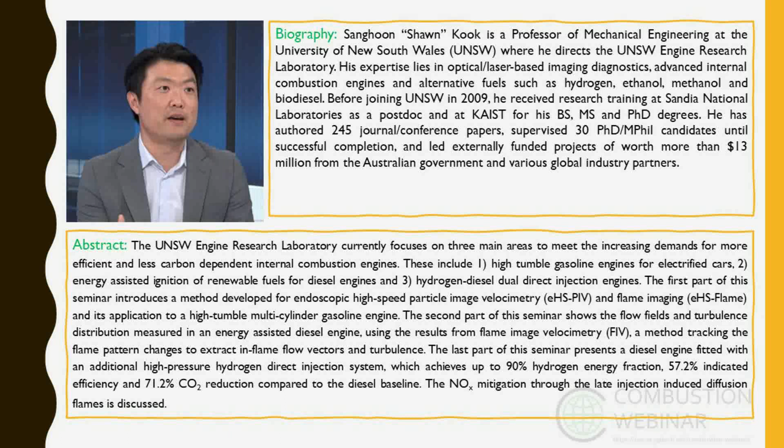My message to the field is that there are many exciting keywords you can explore to further develop or completely redevelop the internal combustion engine for future application. So I picked up 3 topics, keywords. The first is high-tumble, rooted for petrol engine, gasoline engine in your term, for those of you not familiar with the British term. High-tumble is applicable for petrol engine; energy assist is used for diesel engine in operation with low reactivity fuel, and I'll get to that point later on. And the pretty big buzzword: hydrogen.

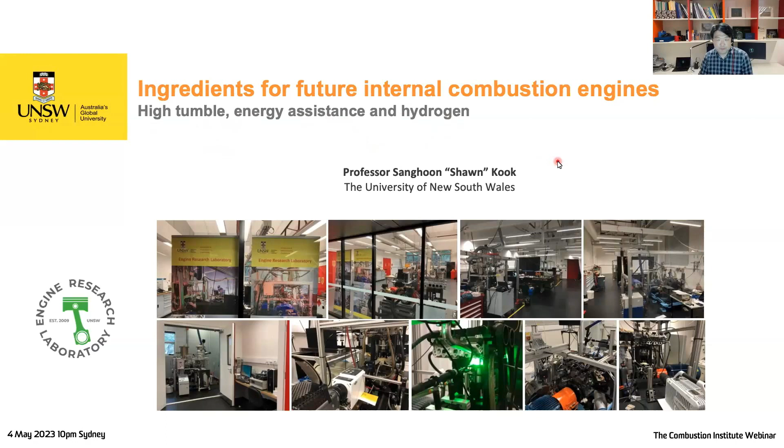I face this, and I think you'll agree with me, that in policymakers' minds, internal combustion engine is pretty much dead. Their impression of the current internal combustion engine is that it's just junk metal with no future in it. In comparison, they think the electric drive with shining color, that would be the future. That's how the policymaker's mind is set.

But in reality, if you are an engineer or scientist knowledgeable of advanced engine technology today, the new engine is looking just like the new electric drive. It's just shining like silver. It's new, purely advanced, many high-tech elements all implemented in this lovely machine.

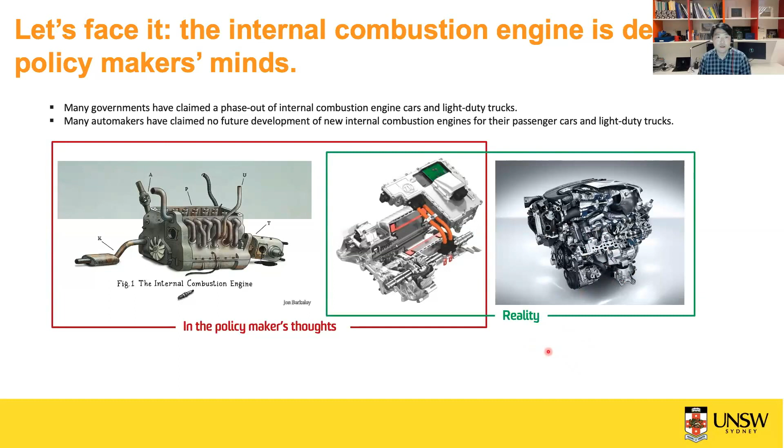So I'd like to suggest a quick reality check before I go into some of the technical details I've prepared. The reality is that people are still buying internal combustion engine vehicles, and they will buy internal combustion vehicles in any foreseeable future. Market analysis is actually saying that even towards 2027, there will be annual growth of the internal combustion engine market exceeding 8% annually.

Bringing this kind of number to investors, they will just jump off and try to bring in any money that they have into it. So this is a still exciting and growing market that everyone can enjoy.

The growth would be definitely around Asian countries, Australia, and the Middle East. But even in the US, there are still many buyers rooting towards the internal combustion engine vehicle. Of course, there's an increasing number of people who would be interested in electric vehicles as their next car, but equally, when it comes down to the real deal of the next vehicle purchase, it actually comes down to internal combustion engine. That's how the market analysis and survey is suggesting.

The policymakers' efforts to completely phase out internal combustion engine in European countries has failed. It is more or less that the experts' voice was finally heard. There are a lot of factors around it, but in the end, it is internal combustion engine that has longer-term value. Having carbon neutral fuel - fuel generated using CO2 so that the emitted CO2 from the vehicle is considered zero towards CO2 contribution to the environment - is carbon neutral fuel. As far as synthetic fuel, like carbon neutral fuel, is used in internal combustion engine, that internal combustion engine will be considered next generation technology too, even in European countries.

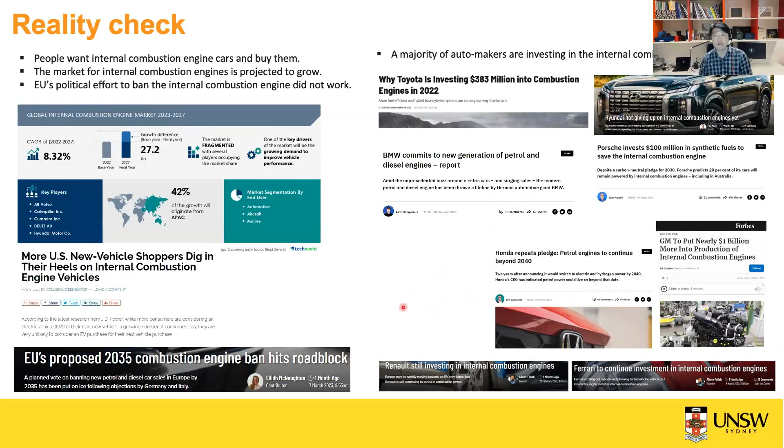That's my stance here. So what do we want? We wanted to develop new technology that can be prepared for the future. And if we have internal combustion engine technology that can be part of the future of mobility, it will definitely be heard. I saw some questions around it, and I don't mind taking those on board during the seminar.

There's a question about the success of comments. I don't know exactly what that means, but if you specify the question again, I'll be able to take it on. If you type in the question, I'm pretty sure I can read it out and address it during the seminar, or Professor Tiegang Fang can.

It's better to answer them at the end, so we can. Oh okay, yeah, that's, thank you. That's also a good option. So I'll give you the talk briefly, and then later try to address the questions live. Even after the webinar, please use the comment section to ask further questions, or try to reach me out - I'll be happy to address any questions.

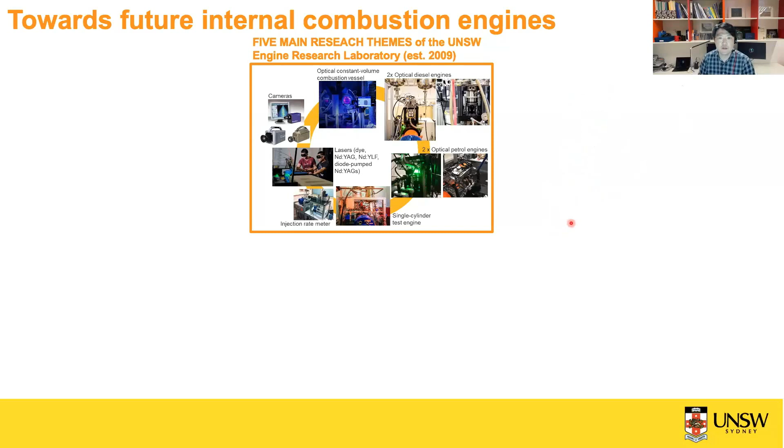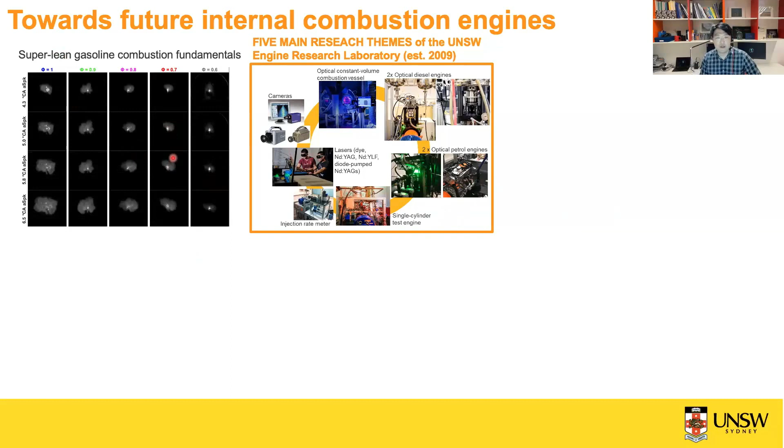At the University of New South Wales, we're working on five main themes at the moment. One would be very consistent with many others' research: super lean burn - gasoline engine running on lean homogeneous or lean stratified mixture for significantly improved fuel economy. That works really well with hybrid operation too, so when the gasoline engine is electrified together with electric drive, it achieves massively improved fuel economy and CO2 reduction in return.

The second theme we are very active in at the moment is flow and turbulence measurement, towards further improved efficiency of the gasoline engine. There are a lot of things that need to be researched regarding petrol engine flow and turbulence, which means there is potential for further improvement regarding fuel economy as well as CO2 reduction. And when it comes down to diesel engine, it's so ubiquitous.

Diesel is versatile for a range of applications. One area we're actively working on is a diesel engine used in unmanned aerial vehicles that is compact, durable, and powerful, and can handle long range operation, especially when the fuel type is very different to conventional diesel. How we address that combustion condition is one main problem we are addressing at the moment.

And of course, a lot of people are interested in hydrogen. We were lucky enough to step into this hydrogen area a few years back, around 2017-18. There was high interest in utilizing existing infrastructure by retrofitting some of the diesel engines. So we took up that research topic and have produced some exciting outcomes, which we'll introduce today.

There's also very long-term research that I will continue no matter what - fundamental research, actually welcomed by the Combustion Institute in many ways. We look into carbon particle structure in a very exciting way, exposing sampling probes right into the reacting flame. Within, there are many soot particles forming, and we change the sampling timing, duration, and all the parameters to look into soot particle evolution and structural evolution during combustion. It's been applied to both diesel engine and petrol engine operations, and keeps producing exciting new papers.

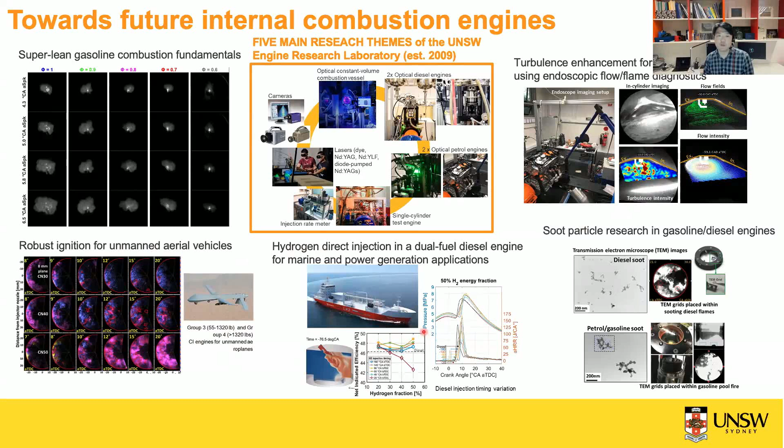For the given time and its timeliness, I prepared flow diagnostics in a petrol engine as one topic, energy assist ignition in a diesel engine as a second topic, and hydrogen in a diesel engine as a dual fuel combustion mode as a third topic.

So there we go - the high-tumble gasoline engine is one technology that can be adopted into electrified powertrain in a very effective manner. For example, Nissan or Ford would say here is BMEP, brake mean effective pressure, which is a power output - a normalized power output, the work divided by displacement volume.

So looking at power output over the engine speed map, we have operating conditions that could be covered by electric drive. All these troublesome operating regions can be covered by electric drive, such as low-end high torque regions where engine speed is low but drivers press on the accelerator pedal aggressively, maybe to take over other cars or go uphill at slow speed. When that happens, fuel economy really struggles, and the power output generation really struggles. That can be boosted by having the electric motor, so the internal combustion engine gets nice assistance from the electric motor in that area.

Just another example is low speed. When it's running at low speed, the fuel economy is actually awful in an internal combustion engine, so that can be assisted by the electric motor. When that happens, the role left for the internal combustion engine is what's called high efficiency operation, within the mid power output and mid engine speed range. That's left as an excellent operation mode for the internal combustion engine, the region where high efficiency can be maintained without worrying about all the other troublesome operation zones in this BMEP and engine speed map.

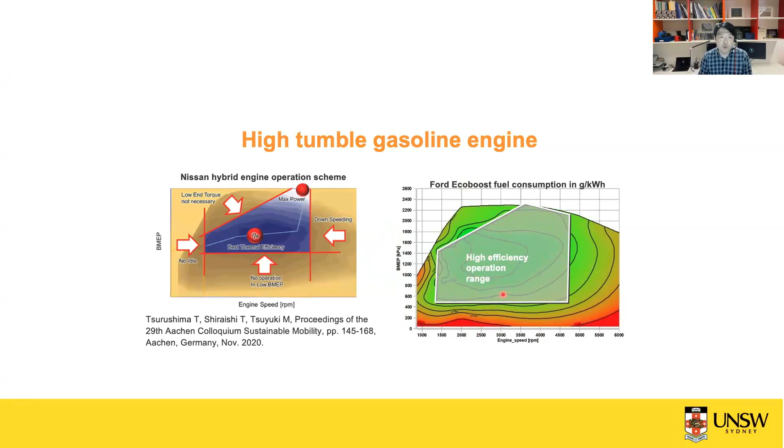So for that high efficiency engine operation, high tumble is the key. Let's run a very quick and brief fluid mechanics lecture here. What's turbulence in an engine? Intake airflow going into the cylinder contains a lot of turbulence - it is in the first place very turbulent flow. The flow goes in, but unfortunately the turbulence decays very quickly.

By the time you want to utilize it, like near top dead center where the spark is applied and flame propagation happens, you wouldn't have much turbulence left. Because of that, we design the flow so the intake flow has a very well-defined structure that can carry this high turbulent energy within. We are encapsulating the high turbulence within the well-defined flow so it can be carried all the way to the near-TDC region. Once the piston reaches near TDC, the space is limited and the flow has nowhere else to go, so it starts to break down.

Specifically in a typical Pent-roof type petrol SI engine combustion chamber, the initial intake flow structure is more or less tumbling. The intake port passage and combustion chamber are designed to create that well-defined bulk flow structure called tumble flow. Near TDC it has nowhere to go other than breaking down, while the tumble flow switches over into swirling motion - swirl flow. During that flow breakup we tend to generate a high level of turbulence that we can utilize near top dead center. That's the brief fluid mechanics of why high tumble flow can be utilized for high turbulence, and in the end a high efficiency petrol engine.

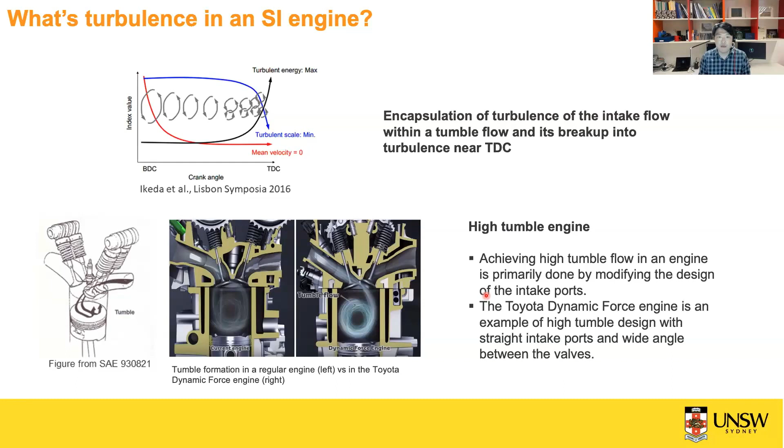For that purpose we've designed a diagnostic method - that's where our excitement is. We maintain the existing 4-cylinder conventional high tumble petrol engine as it is, while adding just 2 holes, one for the camera endoscope and the other for the laser endoscope. Specifically it's a rigid endoscope, a borescope. We have 2 borescopes mounted, one to the side where the laser beam can go in to illuminate whatever is happening within the cylinder, and the camera normal to the angle of the laser beam so we can get a 2-dimensional view of the flow field, like the cross-sectional view of the Pent-roof combustion chamber.

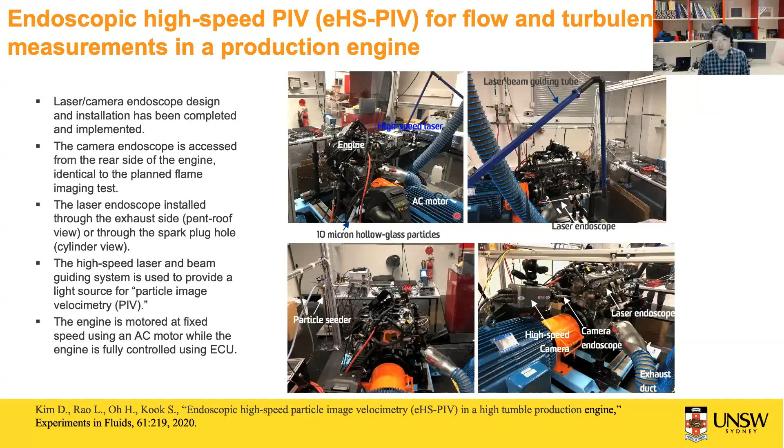There are solid particles, specifically 10 micron diameter hollow glass particles, flowing into the intake manifold, distributed nicely and flowing into the intake port. The flow goes into the combustion chamber and we are visualizing it. The result example is shown here - this is the Pent-roof shape, and the piston is right there. The bright illuminated light is where the laser is hitting the piston top surface. We have particles flowing in together with the in-cylinder flow, tumbling motion, and we're capturing the particle motion.

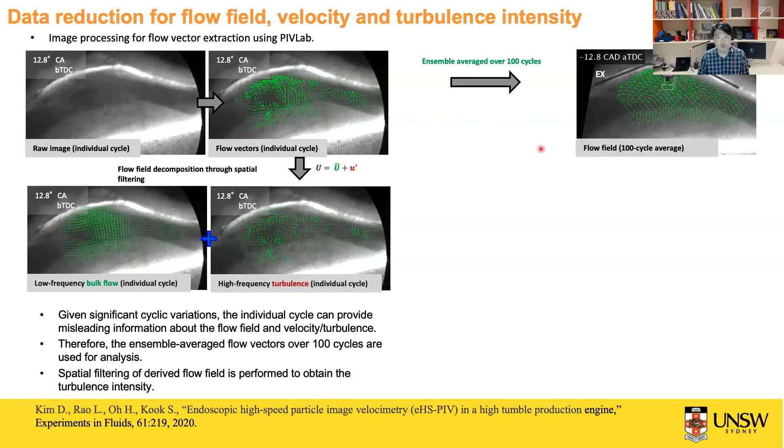We run the PIV algorithm, primarily implementing multipass fast Fourier transform, then get the vectors extracted and apply spatial filtering so that for each individual cycle we can get bulk flow magnitude, bulk flow vectors, as well as turbulence. If you repeat this for over 100 cycles, we get an opportunity to ensemble average these individual cycles to get a well-defined flow structure from the averaged view of the vectors, and can extract quantitative information such as flow velocity magnitude and how that changes over varied crank angles, and extract the turbulence and how much turbulence energy changes along the crank angle.

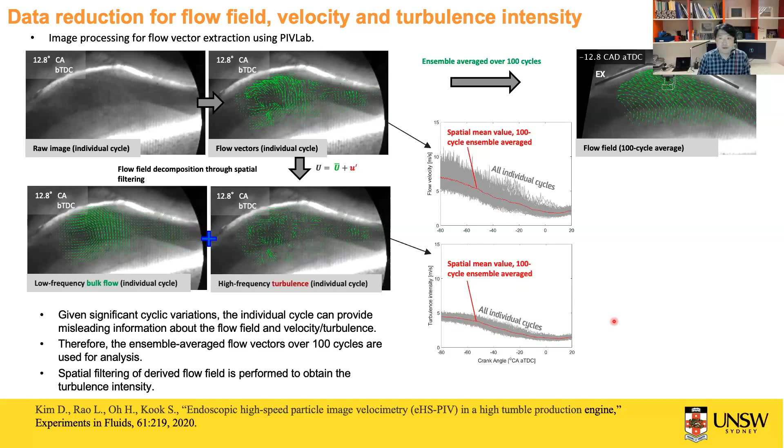So jumping into some example cases, the intake flow is shown as particles flowing into the cylinder as we seeded it, illuminated by the laser beam.

In this particular case, the laser beam is illuminating the center line of the combustion chamber, and towards the end of the compression stroke, we get to see such a well-defined tumbling motion of the flow.

As we are extracting flow vectors, you can see there are many flow vectors during the intake flow, gradually showing such a well-defined direction during the intake stroke, which settles down as the piston is far down there and starts to move up to push up the flow. Then you start redefining the flow structure, just like a tumbling motion.

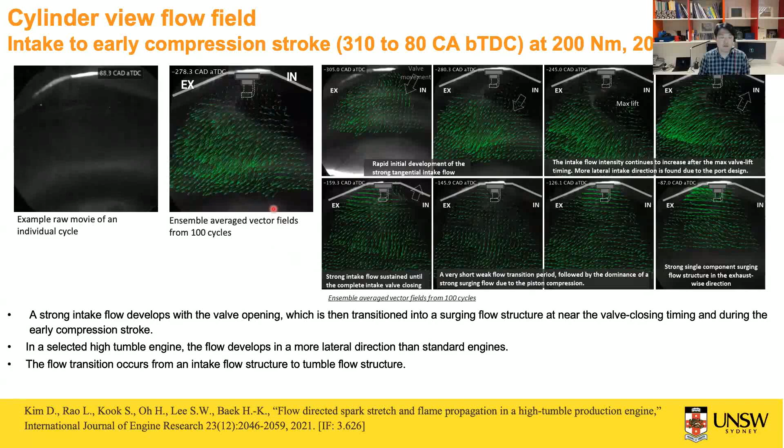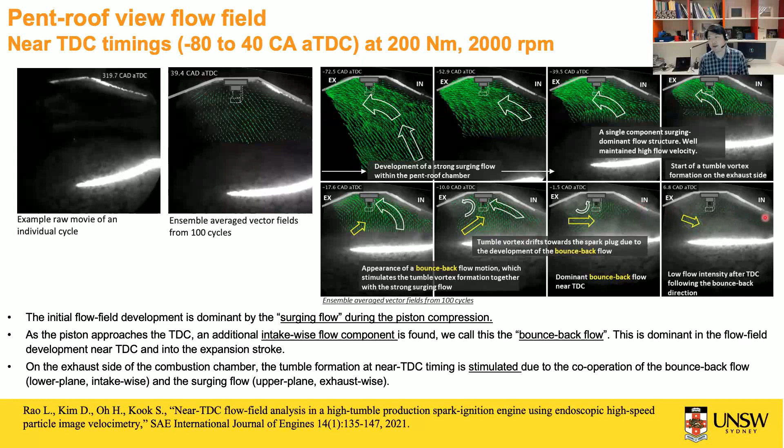And what's the implication of this new flow structure? We try to compare that to the flow structure that's well-defined and well-known from the default intake valve closure setting. The example case I showed you earlier was a result of our intentional setting of advanced intake valve closure. So the intake valve closes earlier, meaning there is a lot of momentum left to maintain this tumbling motion and the flow intensity. When we do that, as shown earlier, we have flow that's going up, hitting the exhaust side and coming back, so there is almost a horizontal flow towards the intake valve side as a leftover.

When we then control the intake valve while setting it at default mode, meaning it's set at a later timing, just like for the Atkinson cycle operation or Miller cycle if there was a supercharger, which is not the case here. But when you set the intake valve closure timing late, then ultimately it's giving you a flow momentum loss. Some of it is actually lost back to the intake valves, and the leftover is smaller. In thermodynamics, that will give you effectively shortened compression strokes, so the thermodynamic efficiency will increase. But from a flow intensity perspective, it's reducing the leftover momentum near top dead center.

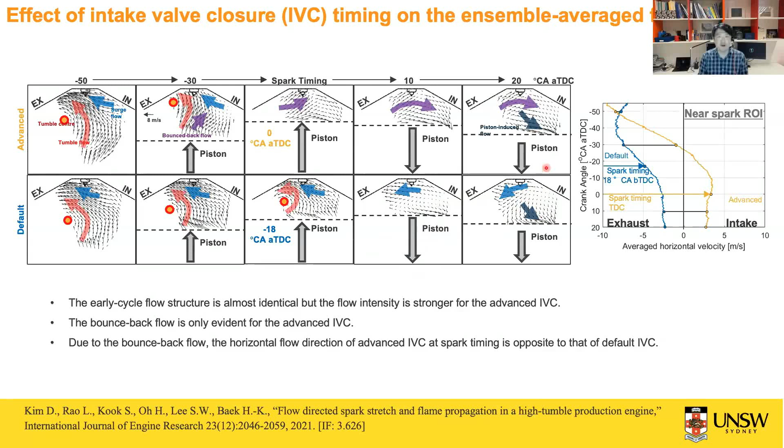So the one I showed you earlier, the flow hitting the exhaust valve side and coming back due to this massive momentum, doesn't really happen. It only settles down and becomes quiet as it maintains its own original flow direction, which is intake to exhaust, just like in the original tumble flow direction. So what would happen to the flame and spark stretch when the flow direction is completely opposite, just by controlling the intake valve closure timing?

We actually run the flame imaging in the actual multi-cylinder engine dynamometer, doing the same endoscopic flame imaging at an extremely high speed. So we get a high strength spark stretch signal, that's a spark plasma, and also the natural combustion luminosity.

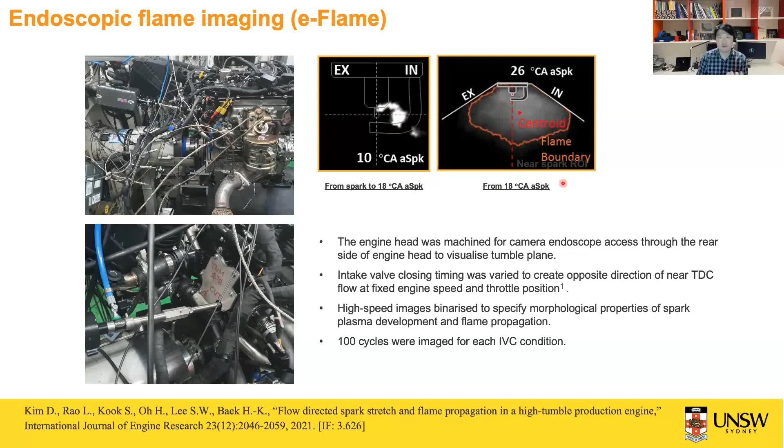It's a flame image, line of sight integrated, quickly captured. And we realized that the spark stretch is actually following the flow direction immediately.

With late intake valve closure, the flow direction was actually towards the exhaust side, so the spark stretch is actually to that end. And advanced intake valve closure gives a spark stretch direction more towards the intake.

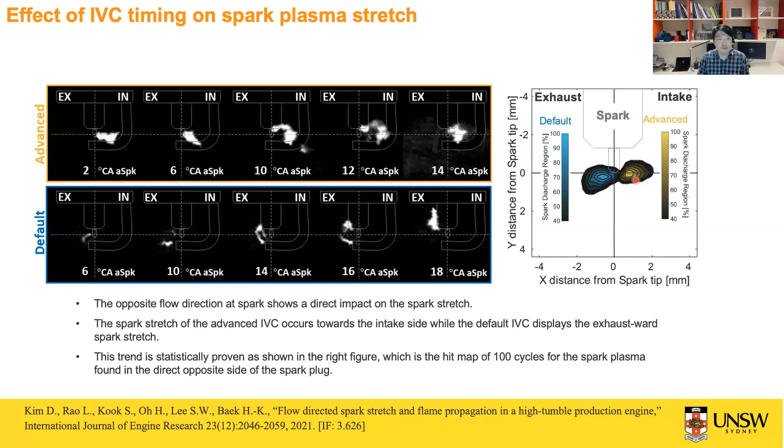Statistically, if we run 100 cycle operations, it is simply consistent with the flow direction. As a result, the flame direction is also directly influenced by that flow direction. When you have flow going towards the intake side, the flame is more skewed towards the intake side.

If the intake valve closure timing is set at default, later than the advanced timing, then the flow direction is more towards the exhaust, and the following flame direction is more skewed towards the exhaust side.

This is a very interesting scientific finding because it has a direct impact on engine design and operating condition setting. Many engine manufacturers will be surprised that just by changing the intake valve timing, we can end up having flame going towards the exhaust side, where the surface temperature is much higher than the intake side. That operating condition might end up having higher knocking condition due to the high temperature exposure of the flame to the high temperature surface on the exhaust side.

So lots of key information that we could have obtained from the exciting new diagnostics called the endoscopic high-speed PIV.

We've been lucky to enjoy close collaboration with the Hyundai Motor Company, who has provided us a range of intake port designs, piston designs, and different operating regimes. We've developed a significant database to check how this flow structure and turbulence distribution changes due to the change of intake port direction, angle, shape, and piston design. More published papers will be produced out of this exciting diagnostics in the future.

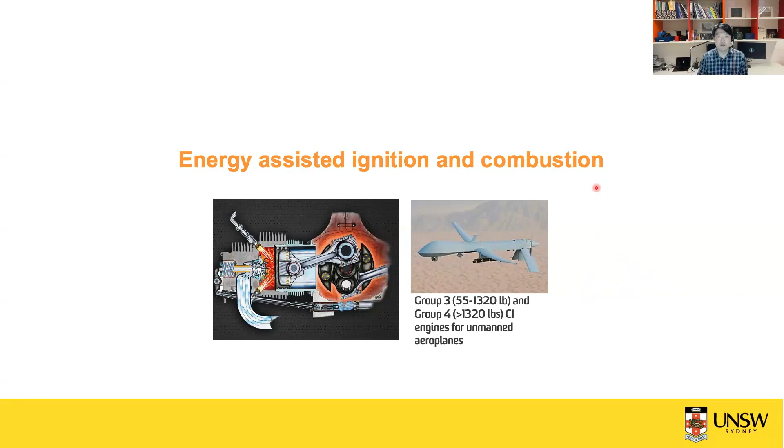When that kind of condition is given, what do we do? How do we ensure that ignition is reliable, repeatable, and combustion is strong enough to operate this diesel engine?

So we've set up the optically accessible single-cylinder diesel engine in our laboratory to operate what's called the ignition assistance system. It's very similar to a diesel glow plug, where heat energy is supplied into the combustion chamber right at the beginning of ignition of the mixtures, so in addition to auto ignition, you get an additional ignition source.

But there are a lot of questions left here: whether the presence of this high temperature solid body acts as a surface ignition source right at the surface of this electric rod, or would it just increase the overall environment temperature of the in-cylinder gas and shorten the ignition delay? How does it impact the combustion if this ignition system plug is running even during the combustion event?

All these questions were addressed by applying our new diagnostics called flame image velocimetry. As opposed to PIV, where we use particles to track the motion of the in-cylinder flow, we run imaging at extremely high speed and resolution to track the variation of this flame contrast.

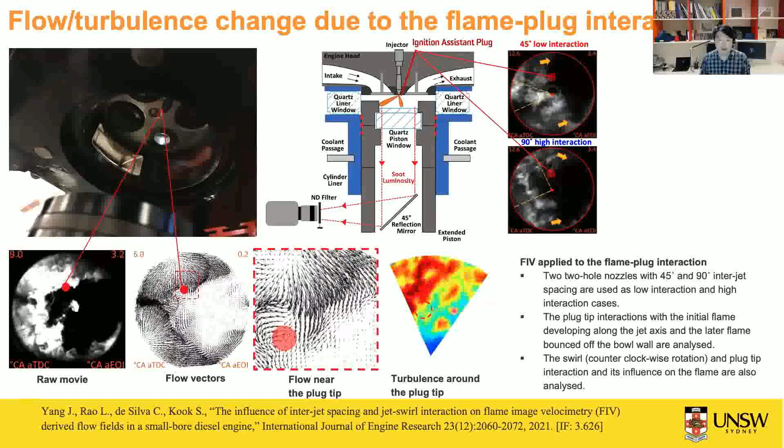Having this quantitative information also gives us an opportunity to extract turbulence out of it. We can run a Reynolds decomposition by applying spatial filtering for each individual cycle. We also have 100 cycles, so ensemble averaging is possible, and then we can extract the turbulence. We estimate how much turbulence is included by running this FIV, flame image velocimetry diagnostics.

That's a typical engine operation, you'll hear lovely engine sound. Engine is running at 1200 RPM. The high-speed camera is running, and we have an image booster to make sure the sensitivity is guaranteed.

Time to time, we visualize liquid spray even before combustion happens. Because of that you see this green light - it's a green LED, not laser, illuminating inside the cylinder specifically for spray visualization.

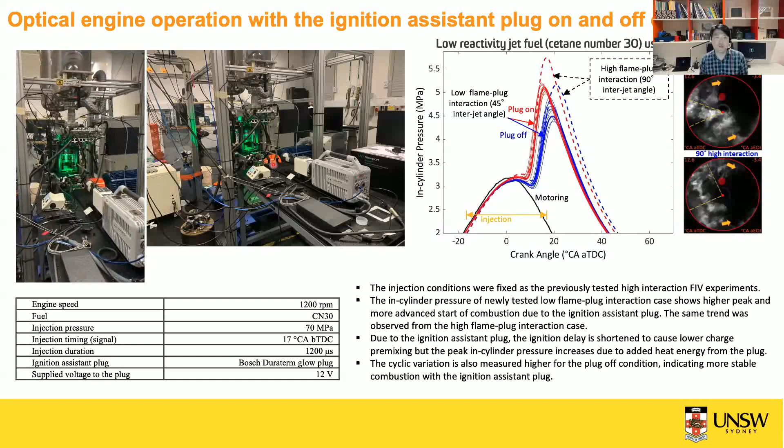After we run the engine to take high-speed images like this, that's the center of the combustion chamber where only 2 nozzle holes are open. Originally this is an injector with 7 holes - we laser welded 5, leaving only 2.

In this selected condition, we get to vary this jet combination to change the jet-to-jet variation and jet-to-jet interaction strength. That angle can be varied by changing the jet arrangement. For this we have jet 1 and jet 2. Jet 2 is going very close to the ignition system plug, positioned right there at the 12 o'clock location.

We get to observe these hot soot luminosity movies and the signal is very strong. When we run the ignition assistant plug added on top, as expected, the ignition starts earlier, and the flame strength, the signal strength we're getting from this hot natural combustion luminosity or hot soot luminosity, increases.

Then we ran this flame image velocimeter that I mentioned earlier, and as we extract the vectors, it confirms that the initial flame development happens earlier when we have the ignition assistant plug, suggesting that the control of combustion would be much better. Ignition is enhanced, so combustion is enhanced, benefiting the operation of this low reactivity fuel.

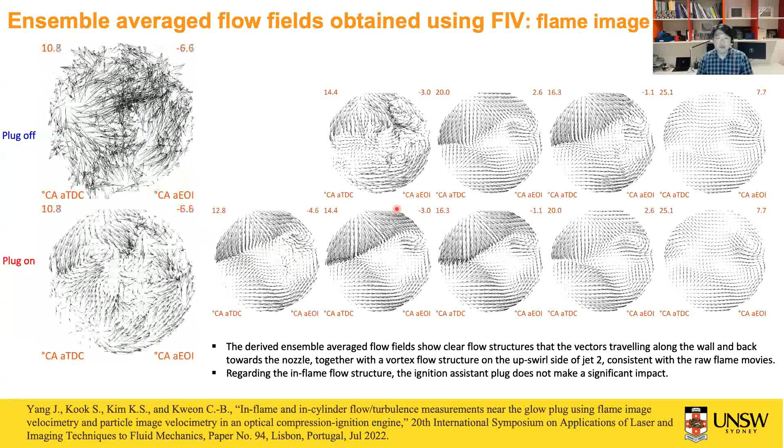Then out of this flow vector information, out of 100 cycles, we extracted the bulk flow magnitude as well as turbulence, both in meters per second units. For direct comparison between the plug-off and plug-on conditions, we compare bulk flow magnitude.

It actually enhances in some areas, particularly for the jet head, the wall jet head where the ignition assistant plug was located very close by. For turbulence also we see this enhancement overall, as well as in a specific region where jet 2, the wall jet head, has much enhanced turbulence observed from the FIV analysis.

From this flame image velocimetry analysis, we could extract the turbulence or bulk flow magnitude value as quantitative information, confirming that when we add ignition energy to the engine through the ignition assistant plug, we enjoy enhanced turbulence and enhanced bulk flow, which explains the enhanced ignition and combustion observed from the engine performance tests and all.

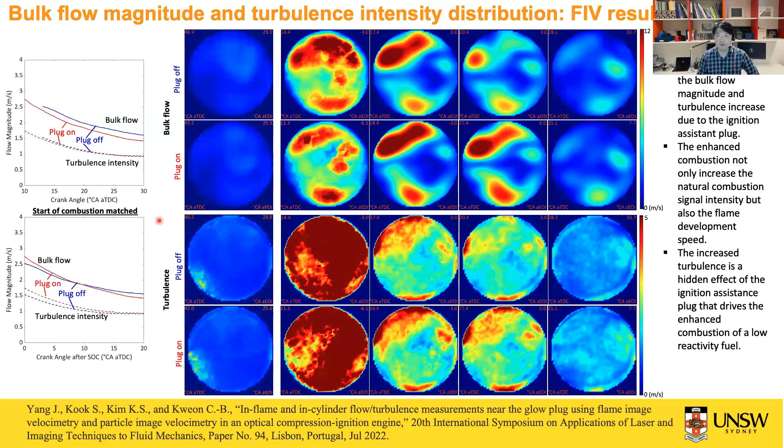So there are a lot of exciting diagnostics we can perform on the diesel engine. It will last much longer than anyone else expected.

And towards the final topic, I have hydrogen. The initial idea originated from the government that governs my university, the New South Wales government. They thought we could actually develop hydrogen production and storage technology that can revolutionize the world.

The idea was that in Australia, where the population is very low but the land is large, like China, United States, Canada, or Brazil, we use abundant solar and renewable energy, wind energy and solar energy, and any leftover that wouldn't be used during the peak hour could run electrolyzer operation to separate water into hydrogen and oxygen. Hydrogen would then be processed together with nitrogen to generate ammonia.

And then ammonia would be shipped out to other countries where energy demand is really high, like Japan, Korea, and China. That was the original idea.

The development stage at the moment is actually to the level that hydrogen production is fully capable in Australia for renewable hydrogen production, and liquefied hydrogen has been shipped between Kobe, Japan, and Melbourne, Australia. The port-to-port shipping was successfully done last year. The Kawasaki Heavy Industry ship was operated with liquefied hydrogen, so it was shipped all the way to Australia, and the renewable hydrogen produced in Australia was filled into the container, and they traveled back to Japan.

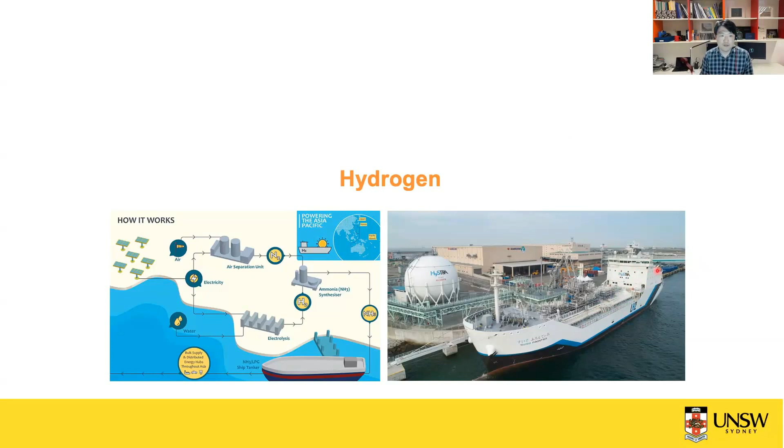And it's not just for the marine engine, but pretty much any size of diesel engine or petrol engine could operate on hydrogen as a fuel.

I am old enough to remember the first wave of hydrogen that Ford was investing in, Mazda, part of Ford at the time, investing in, and also BMW demonstrating their lovely Hydrogen 7 vehicle at Munich Airport. All this hydrogen engine technology development was a big buzzword in the early 2000s. But then, as I mentioned, a lot of senior professors also mentioned there was a big boom in the late 70s around hydrogen. So maybe that's a second wave.

But for me, it's the third and current wave that we're looking at with big excitement, that Toyota has developed this Toyota Corolla race car that implements very high pressure direct hydrogen injection into their petrol engine. And there are many companies investing in this, some construction equipment companies, some retrofitting potential, the heavy-duty diesel engine manufacturers and marine engine manufacturers, very large-scale engine manufacturers, are all committed to introducing new hydrogen engines.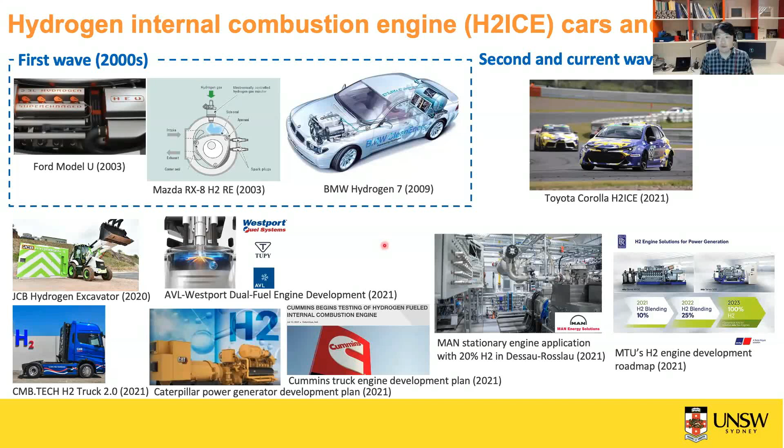But when you look at the details, there are a range of technologies, not just a single hydrogen engine technology. Some of them are implementing high-pressure SI engines. Some of them are low-pressure direct injection SI engines. Some of them are simple substitution of intake air with a fraction of hydrogen, that's port injection, or even intake manifold supply of hydrogen. Some engine manufacturers are introducing an integrated system where a single injector can do gaseous hydrogen injection and diesel pilot injection just from one single injector. There are a lot of technologies being implemented.

So as a brief introduction of hydrogen engine technology, I picked up some of the most advanced technologies of today, and it has to be divided into two: one is for passenger cars, the other is more of a large bore heavy duty application. So for passenger car applications, the most advanced research I actually found from the original injector manufacturers.

The first one is Bosch, as always, who have looked into the hydrogen jet formation when the 50 bar, low pressure direct injection injector, was tested. There's a very interesting topic around it, that the hydrogen must have longer penetration, otherwise it will just attach to the wall thanks to its high diffusivity. So the Bosch researchers intentionally selected a nozzle configuration that can drive the hydrogen jet all the way down without being slowed too quickly, or intentionally selected a case where there is a ducted channel right at the exit of the nozzle tip, so that the flow of hydrogen is directed downwards more, to maintain its original momentum. For BorgWarner, which is Delphi now, they are looking into a very similar concept, 50 bar low pressure direct injection for passenger car SI engine applications.

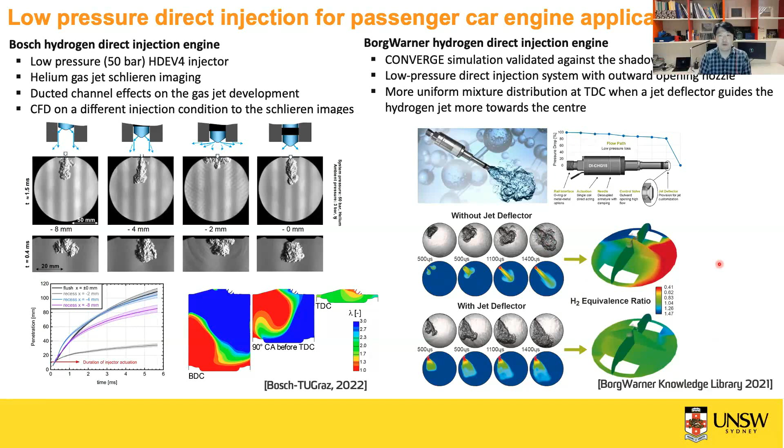But for heavy duty applications, the cost limitation restriction isn't as high as for passenger cars, and there's lots of space available within the vehicle. So their application is more towards high pressure.

For heavy duty applications, there's an SI engine version and a CI engine version. The SI engine is more towards hydrogen main fuel injection, or some use port injection, making a very lean hydrogen air homogeneous mixture. The ignition source is hydrogen, ignited by a spark plug, and the flame comes out of a small hole—so it's a turbulent jet igniter. Turbulent jet ignition happens within this lean main hydrogen fuel mixture. That's the approach run by some manufacturers.

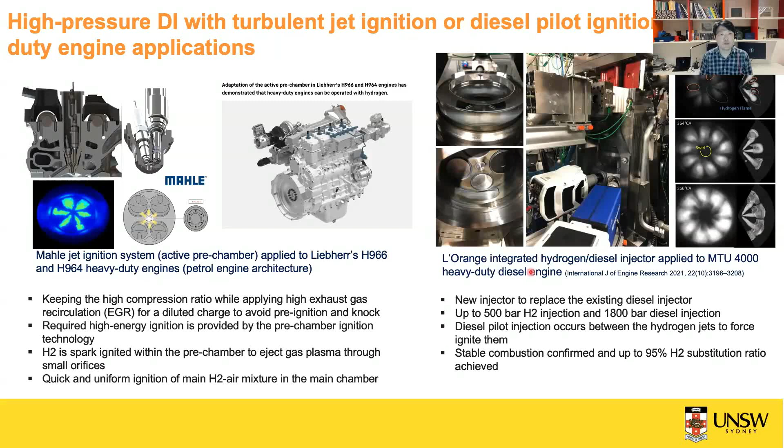Another approach is converting an existing diesel engine into a hydrogen engine, using an integrated injector where the hydrogen jet comes out from multiple holes, and in between there's a small diesel needle within the same integrated injector. That diesel pilot flame is generated from diesel fuel, and serves as an ignition source for the hydrogen jets. So it's not compression ignition anymore—compression ignition happens only for the pilot fuel, which causes ignition of the hydrogen mixture. Multiple hydrogen jets are ignited through control of the diesel pilot flame. For me, that's the most advanced version, maintaining high engine efficiency while significantly reducing CO2 emissions compared to a diesel engine.

UNSW's approach has been similar to those—diesel hydrogen main fuel with diesel pilot ignition—but in a different way. We maintain the existing diesel injector as it is, but add an additional hydrogen injector separate from it. So it's a two-injector operation.

This idea wasn't just back-of-the-envelope calculation or whiteboard concept drawing, but came from our long-time research on hydrogen jet behavior. In the laboratory we have a high pressure constant volume combustion chamber, something similar to Dr. Dennis Siebers' constant volume chamber, now retired, back at Sandia National Laboratory. I personally did my postdoctoral research with Lyle Pickett, who was at the time operating Dennis Siebers' designed high pressure combustion chamber—now he's very happy with a constant flow chamber he created himself. What a fantastic lab he has there. Here at UNSW, we mimic the design of Dennis Siebers' chamber and maintain that capability in the laboratory.

There we injected hydrogen at very high pressure—200 bar, 20 megapascal—along with a small amount of diesel. Before implementing this reacting case, we did a lot of research on the hydrogen jet itself to fully understand what happens with this high pressure hydrogen injection.

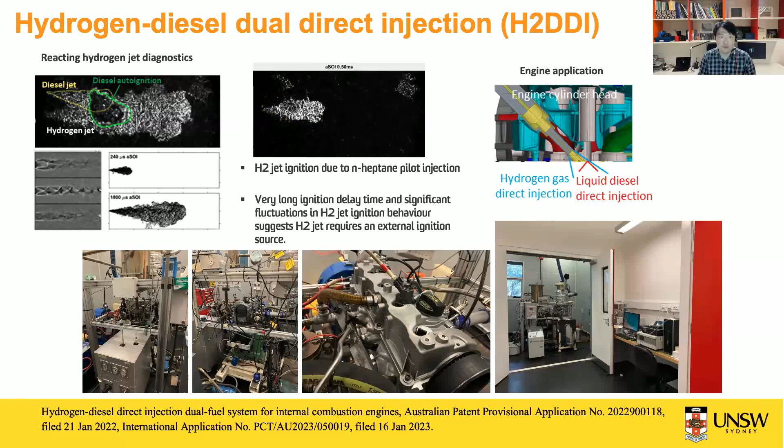For this hydrogen jet operation, the idea was: if you can do this nice Schlieren imaging showing the shadow of a 200 bar hydrogen gas jet, why not put a diesel flame, normal heptane in this case, let it auto-ignite, and see what happens.

So we looked into very long dwell operation between hydrogen and diesel injection. We intentionally maintained a long delay, and ended up with only a very small amount of heat released from this, so we weren't really happy with it.

We moved to a reduced gap, so the hydrogen jet is right there, and then we put the diesel flame in. We saw this hydrogen jet turning into a reacting hydrogen jet very quickly, maintaining a heat release profile that now looks just like a typical diesel engine, with a premixed burn followed by a bit of mixing-controlled burn.

We then shortened that further so the diesel flame and hydrogen jet development occur almost at the same time. The diesel flame goes in, and by the time the hydrogen jet reaches the expected auto-ignition point, the reaction starts quickly, followed by an extended mixing-controlled combustion phase, as expected. So we're effectively controlling the premix burn and diffusion flame mode just by controlling the sequence and dwell time between hydrogen and diesel direct injection.

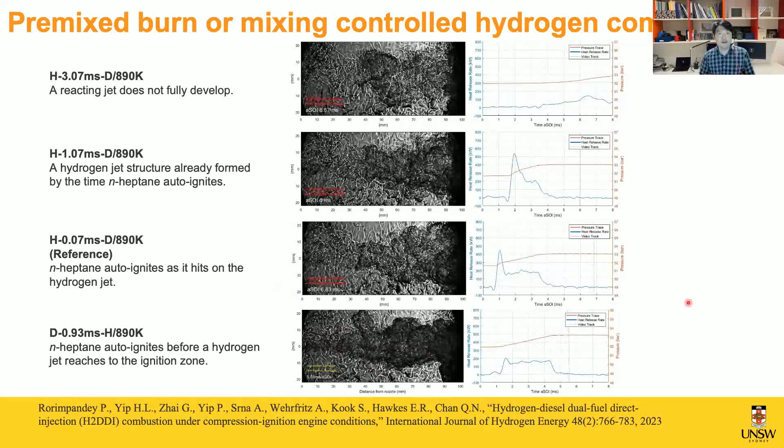That translates to engine test conditions as injection timing control. This is the implementation of what we learned from the optical diagnostics in the constant volume chamber. In the engine, we set the hydrogen direct injection timing anywhere from bottom dead center, 180 before top dead center, to 60 before top dead center.

It turns out this is more or less the premixed combustion mode we noticed earlier, where largely the heat is released from the premixed burn, and that was actually limiting the proportion of hydrogen that could be used in the engine. For example, at BDC operation we could only go down to 30% diesel, meaning 70% of the total energy was supplied by hydrogen - a 70-30 operation with hydrogen as the main fuel and 30% diesel.

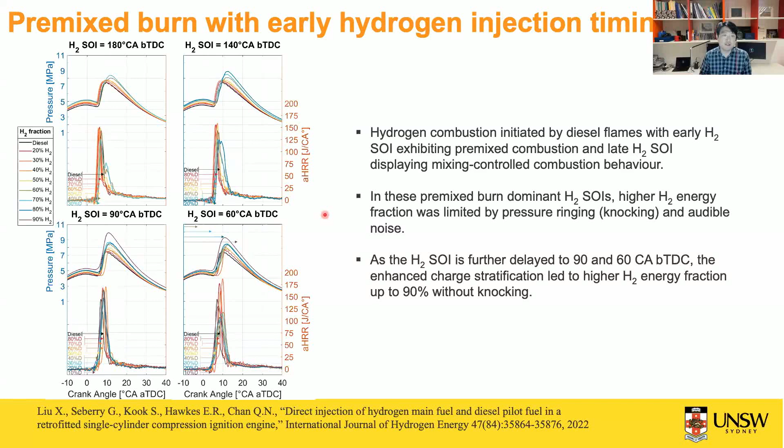We wanted to increase the hydrogen energy fraction as much as possible, but that wasn't possible - if we increased the hydrogen fraction further, the engine started to struggle with massive knocking. This shows that hydrogen premixed combustion has a clear limitation, which also explains why port injection or intake manifold injection of hydrogen wouldn't give an ultimate answer for dual fuel combustion operation, since a premixed hydrogen burn would struggle and be limited by massive, engine-damaging knocking conditions.

So we delayed the injection timing much later, and that's where we started to see behavior looking like a diffusion flame, mixing-controlled combustion behavior. With that, we could achieve up to 90% hydrogen operation, meaning 90% of total energy was supplied by hydrogen and only 10% from diesel.

We couldn't reduce the diesel fraction further in this case because the diesel injector duration was limited - we couldn't reduce that injection duration any further. To do that, we'd need to increase the load so the injection duration and total amount would increase. Still, we were very happy with this 90% hydrogen, 10% diesel mass operation.

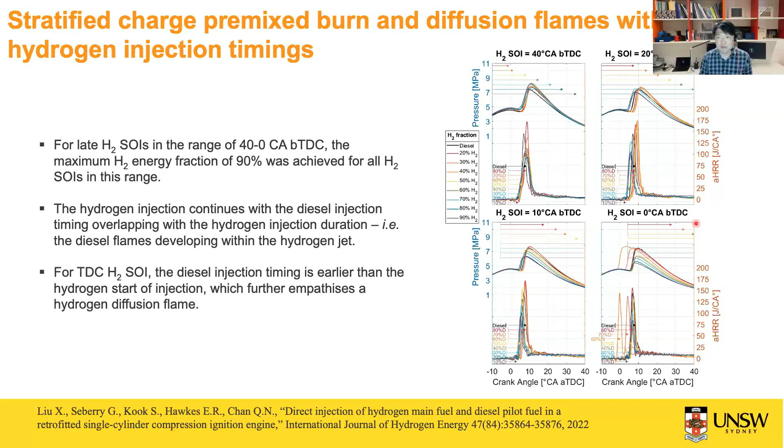This is more towards diffusion flame combustion, and especially when the hydrogen injection was done at TDC - the end of the compression stroke - we ended up with almost 100% diffusion combustion, mixing-controlled combustion.

That crossover point between premixed burn and mixing-controlled combustion could be identified just by looking at the combustion phasing measurement. CA50 is the crank angle position where 50% of total heat release is observed. For example, with 90% hydrogen operation, the hydrogen injection timing has to be somewhere around 30 crank angle degrees before top dead center, for the combustion phasing to be maintained while the mode switching happens in between.

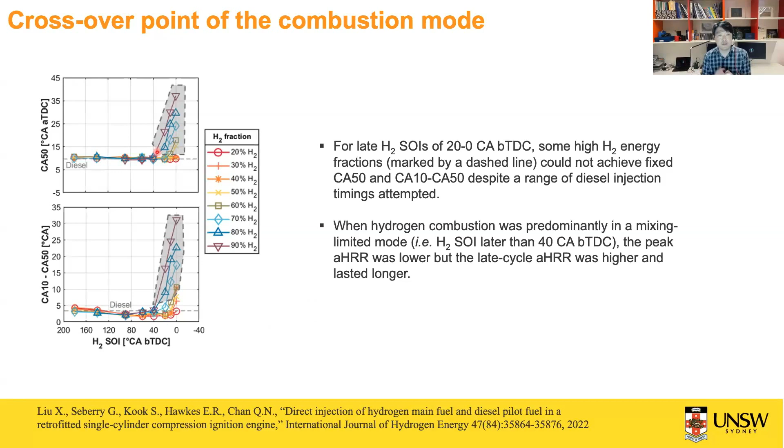So if it's earlier than 30, it's more or less premixed combustion. If it's later than that, it's more towards mixing controlled combustion. What's the benefit of controlling that? Control of efficiency and NOx.

The efficiency we can achieve out of this is impressive. With premixed hydrogen, 90% energy supplied, we can hit a net indicated efficiency of 57.5%, which in theoretical comparison is higher than even the fuel cell system. Pretty exciting—but then looking at the NOx chart, we start to feel depressed, thinking, okay, what do we do with this massive NOx amount?

But then looking at the CO2 emissions we're getting, we were excited again—if we control the hydrogen injection timing, depending on the engine operating condition, to match the highly efficient diesel operation, the NOx also levels with the baseline diesel operation.

In this example, setting 30 crank angle before TDC as the hydrogen injection timing gets us almost identical engine efficiency to baseline diesel operation and the same NOx level, while simply enjoying the CO2 reduction—almost 71% reduction just from hydrogen operation in an existing, retrofitted diesel engine. So there's great excitement about it.

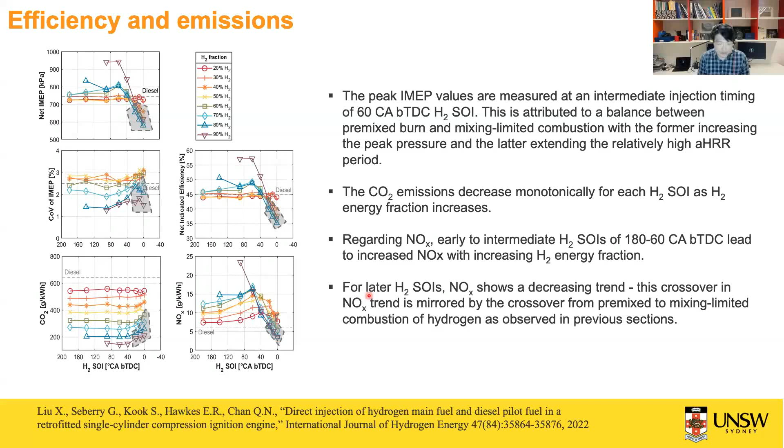For future direction of this hydrogen engine application, we continue fundamental hydrogen jet research while scaling up our operation. The initial engine was only 83 millimeter bore, half a liter per cylinder. The new engine we've just installed has 1 liter per cylinder, 100 millimeter bore, directly suitable for many power generators out in the Australian mining sites.

Not only dynamometer testing, but also continued optical engine diagnostics—many exciting diagnostics lining up for hydrogen mixture making and dual fuel combustion operation. So the research will continue.

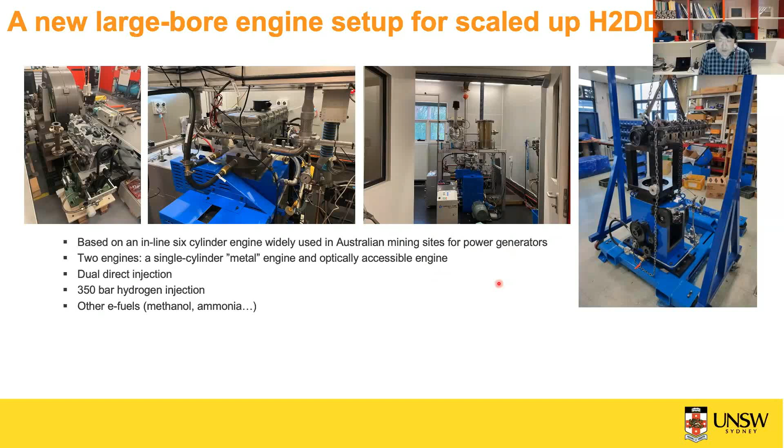To sum up briefly, I've introduced ingredients for the future internal combustion engine. The gasoline engine will survive much longer than my lifetime and many of yours. That requires further improvement in efficiency, meaning we have ample opportunity looking into its flow structure, turbulence distribution, and how efficiency improvement can be achieved in this existing petrol/gasoline engine.

For diesel application, we might be diverted into other application areas for now. Who knows, you might come back to passenger car application. Until then, we'll find other opportunities like backup power generators and unmanned aerial vehicles where diesel engines are still actively used, and where there's clear demand for alternative fuel usage or a specific type of fuel that has to be refined for utilization in the diesel engine.

To that end, we continue to develop exciting new diagnostics to provide enhanced fundamental knowledge. And for hydrogen, we've achieved 90% hydrogen high-pressure direct injection by energy and 10% diesel operation, achieving a very impressive 70% CO2 reduction. This is getting a lot of attention from everyone—not only research, but also investors and the public, which we really enjoy and appreciate.